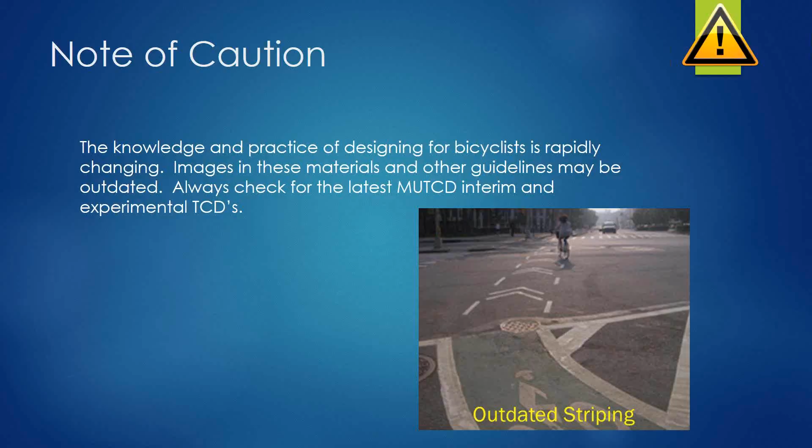So I want to begin by talking about, why are we doing all this effort, particularly for bicycle safety, or bicyclist safety, I would rather say. We've been very auto-focused in our country for a long time. A lot of people have set up their transportation needs based on the automobile. So where does the shift come, or why do we want to consider other modes of travel? There certainly are some opportunities.

First of all, in a national study of transportation, it was found that 50% of all trips are less than or equal to 3 miles in length. More than 1/3 of US adults say they would commute to work by bike if safe facilities were available. And finally, 1 out of every 11 US households do not own an automobile.

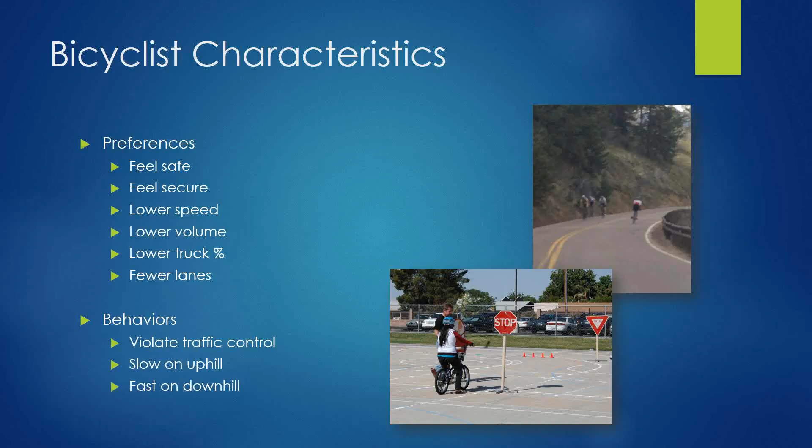Bicyclists will certainly be slower on the uphill. The longer the uphill is, the slower they'll get. So that might contribute to how we think about where we place bike lanes. Maybe we don't need bike lanes on both sides of the street, because on the downhill, they're speeding up, but on the uphill, they're slowing down. So thinking about the conditions and the operations of the bicyclist and how we choose facilities is important.

In many places, it's legal to ride on the sidewalk, and I did not check to see if that's so in Florida, but even if it's not legal, very often people will do it because they feel safer there. They're further away from traffic. However, in certain conditions, this can be the most dangerous thing that a bicyclist can do.

Consider a motorist who's approaching the street from a side road or a driveway. And as they approach, they see that there's no pedestrians on the sidewalk. And so then they turn their focus to finding a gap in traffic and turning onto the roadway. Now, the bicyclist, who can travel much faster on the sidewalk, may be much further away from that conflict point. And while the motorist is looking for gaps in traffic, they approach the car. The motorist then pulls out into or in front of the bicyclist and causes a crash. So cycling on the sidewalk can be a concern, particularly where we have driveways and conflict points.

In terms of the crash records we have across the US, in 2015, we had 818 reported deaths due to bicycle crashes, and an estimated 45,000 injured. The cyclists accounted for 2.3% of all the traffic fatalities in the country, but they only made up 1% of the trips across the country. And if you think about that further, the trips are probably a lot shorter. So if we were talking about miles traveled, the percentage that bicyclists travel as compared to motor vehicles is much smaller. Certainly bicyclists are overrepresented in our crash data.

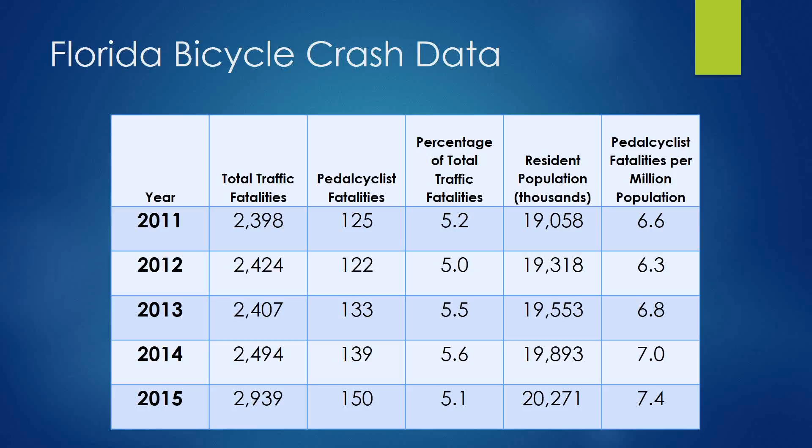And here's some data for the state of Florida, where you are showing that about 5.5% of your traffic fatalities are bicyclists. You're averaging between 125 and 150 bicycle fatalities every year.

And so we've talked about the crash data and the numbers of deaths and injuries that are experienced, but how do we truly measure safety? Certainly, because we can count the injuries and fatalities, that's one way. Certainly being alive and whole when you arrive at your destination is important.

But more than that, being calm and confident, feeling like you would want to take a bike ride again, feeling like that you can travel home the same way you came without putting your life at risk is an important consideration. I had an experience just last week where a garbage truck passed me within 2 feet.

And that seems like plenty of space. You know, they didn't touch me, certainly, but I had thoughts of falling over and ending up under this garbage truck and what might have happened with just a minor slip of the handlebars. That gave me pause and made me think about what I was doing and how I could have prevented that and what I could have done differently. And certainly if there'd been more separation between me and that garbage truck, I would have felt calmer and more confident about my experience on the ride.

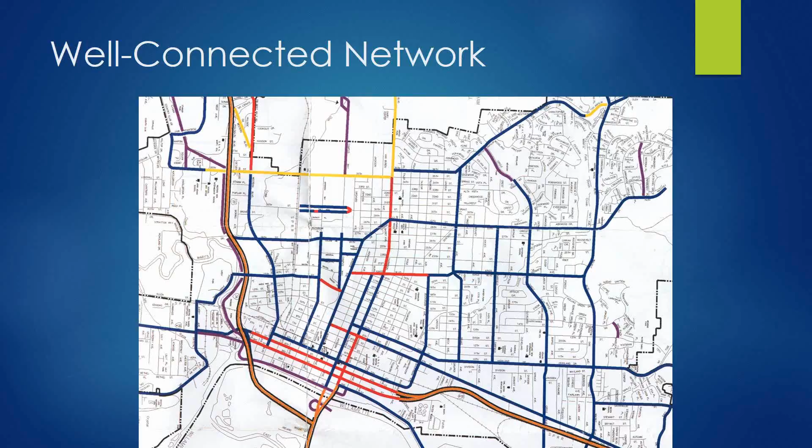I'd like to review some core safety concepts for designing for bicyclists. First of all, it's difficult sometimes to get the data we'd like to have to make a quantitative evaluation of what we're designing, but we do know what contributes to or detracts from the safety and the feeling of safety and comfort that a bicyclist might experience. And so keeping these forefront in our minds as we're evaluating our public rights of way in our streets, we can diagnose where those risk points are and think about what countermeasures might reduce the risk that is experienced.

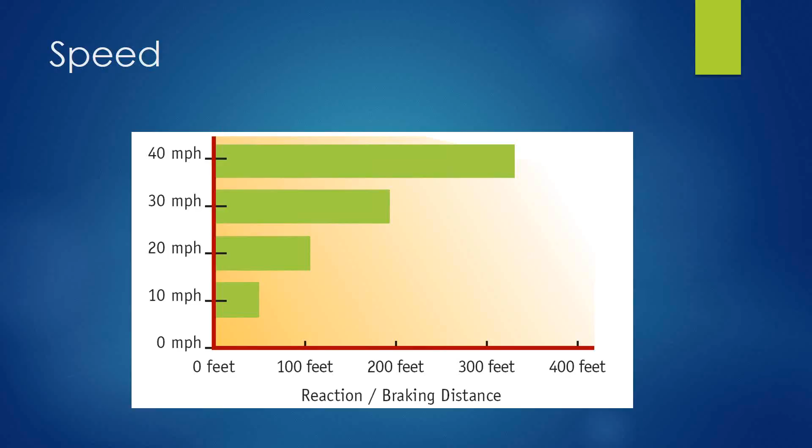The first key safety concept is speed. Certainly, speed is going to contribute to the reaction time of motorists approaching a bicyclist, or even a bicyclist approaching an intersection at the speed they're traveling. And the higher the speeds are, the more distance it's going to take for the motorist to brake and stop and avoid a crash with a bicyclist.

But more than that, thinking about the different modes of travel, a motorist has that armored vehicle around them to keep them secure. They have airbags and seatbelts. A bicyclist may have a helmet. And more than that, the bicycle itself might become a projectile in a crash, where the bicyclist could be further injured by the fact that their bicycle is flying through the air with them.

This study that I'm showing is related to pedestrians more specifically, but I would suggest that other than the helmet and the bike, bicyclists and pedestrians are very similar. They don't have the seatbelts, they don't have the airbags, they don't have the vehicle that's surrounding and protecting them in a crash. And we find that at 20 miles per hour, 9 out of 10 pedestrians who are in a crash with a motor vehicle will survive. However, at 40 miles an hour, 1 out of 10 pedestrians who are in a crash with a motor vehicle will survive. So 9 out of 10 pedestrians in that crash at that speed will die.

And this is pretty significant when we're thinking about the speeds that motor vehicles are traveling on our roadway. And we can think about, are there options to change the context of the roadway and have slower speeds? Or maybe there's an alternate corridor that can be used. Or understanding that the speeds are a significant risk, providing more separation for the bicyclist from the moving motor vehicles.

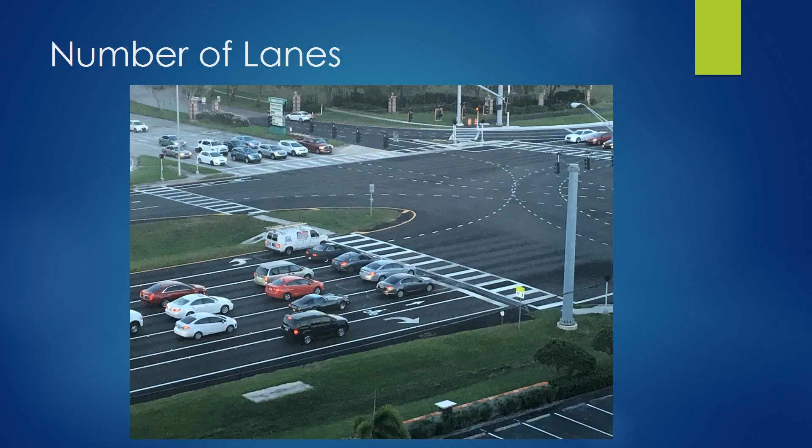The next safety concept is visibility and conspicuity. Certainly, it's important for the motorist to be able to see and recognize where those conflict points are with the bicyclist, and for the bicyclist to be aware of when motor vehicles are going to be crossing their path.

And nighttime conditions can be a huge concern. Very often the street lighting we have on a roadway is lighting the street, but it doesn't adequately light the area where the bicyclist might be traveling, in the bike lane near the shoulder, or maybe the intersections have a large luminaire that casts a glow over the center of the intersection, but it doesn't illuminate the crossing conflict points.

And then we can use traffic control devices sometimes to highlight the conflict points where the motor vehicle and the bicyclist are crossing paths, trying to raise awareness, make both the bicyclist and the motorist more watchful of those locations.

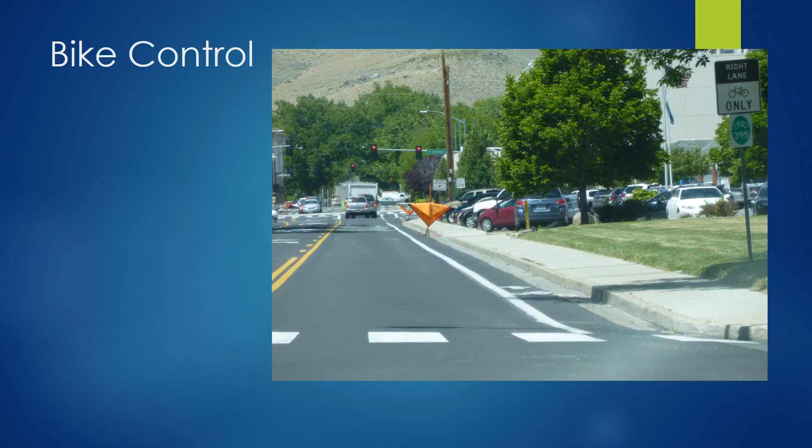Bike control is a term I like to use to describe the condition of the pavement or the things that we put in the pavement. Sometimes it's just the debris that brushes over. I like to use the term road crocodiles or road alligators, and you probably have real crocodiles and alligators in Florida, but I think of those tire remnants that are left behind by the trucks, and so often they end up in the shoulder or the bike lane. But the sand and debris that can end up in the bike lane is a concern, but also things like the lip of the gutter or utilities or pavement condition.

There was a city where I was riding in their bike lane. It was a perfectly good bike lane. There had been some utility work done on that street, and the utility line was cut longitudinally down the center of the bike lane, right where my bicycle tire would be. And so I'm riding on a bike with a 1-inch wide tire, and there's a seam that's making it difficult to travel. Whereas if that utility cut had been in the motor vehicle lane, I don't think the motorist would have hardly noticed it. But it certainly was an issue for me as a bicyclist.

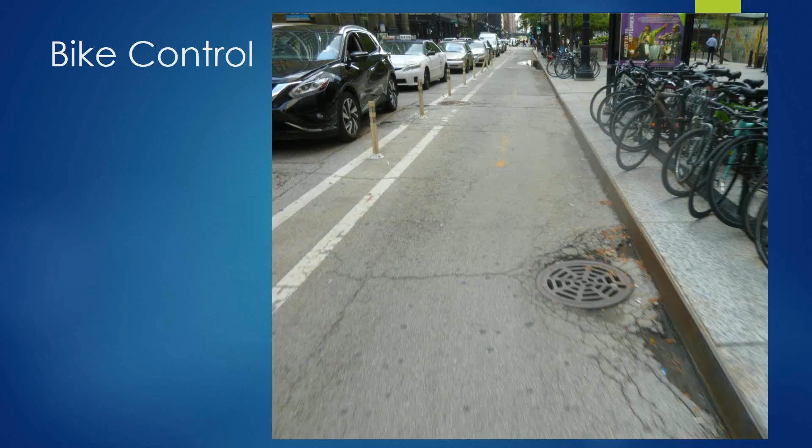And finally, the last issue is connectivity. If I'm riding along in a nice, comfortable bike facility, and then it simply ends, and I'm falling off the face of the earth, essentially, then what do I do? So often, because we don't have the connectivity, we find ourselves stranded in places that are not comfortable or not safe given the skill level of the bicyclist.

And this can be a challenge because as we're developing these facilities, we can't necessarily install them all at once, but it's important to be thoughtful about the transitions, at least providing a few extra cues at the beginning or the end of the facility to try to help someone transition over to where they should be as they continue their journey.

And I've seen some things that I think are a misapplication of some of the signage that we have. We have signs that say bike lane begins, bike lane ends, and so often I have seen locations where along the corridor, they'll have a lovely bike lane between the intersections, and at every intersection on the corridor, the bike lane ends. And on the far side of the intersection, the bike lane begins again. And while that's true, I think we've treated the bicyclists poorly by letting them make a free-for-all through the intersection without providing any sort of continuity or even a few shared lane markings through the intersection to help them progress.

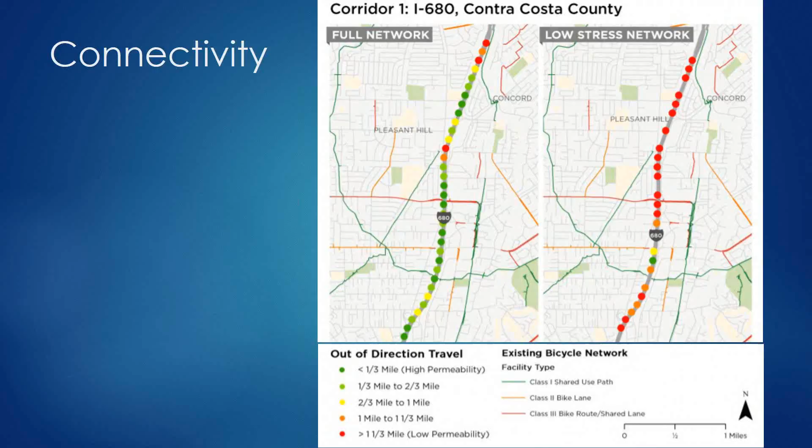And so on the left, they looked at all facilities that were available to bicyclists. But on the right, they looked at only the comfortable bike facilities and looked at how far out of direction you'd have to travel to remain on a comfortable route. And so this is an interesting measure of looking at network connectivity. And there are other tips and tools in that guidance document that I'll provide a reference to you later.

So just to review, these key safety factors are speed, number of lanes, visibility, traffic volume and composition, conflict points, proximity to moving motor vehicles, how well we can control the bicycle, what that pavement condition is, and connectivity of the network.

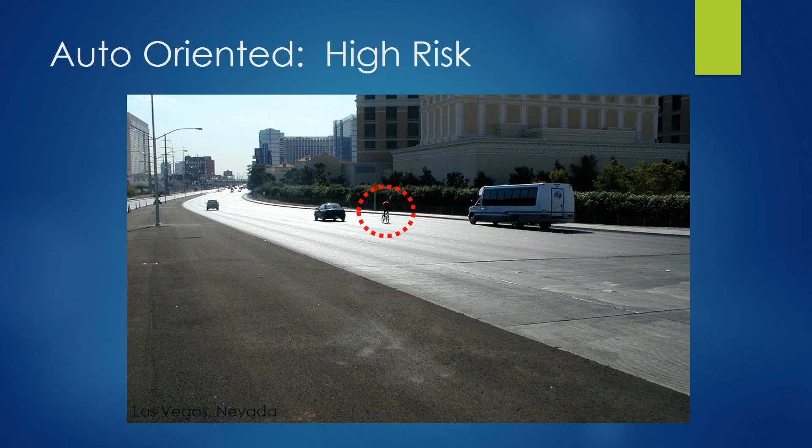Alternatively, we have this corridor in Las Vegas. Certainly, motor vehicles rule on this corridor, and yet we still have a hardy bicyclist out there in the middle of the road trying to get to where they need to go. The risks are going to be higher in this context. So we have to ask ourselves, are we going to provide space on the street or provide space away from the street? Or are we going to slow traffic down in some way and adjust the context so that bicyclists can mix with traffic safely?

And instead of asking ourselves, where can we put bicyclists? This was sort of the question when I was a novice designer working for a state agency. We'd focus all of the attention on motor vehicle volumes and queue lengths and storage for the intersections. And at the end of all of that, well, if this was an identified corridor for a bike lane, we might squeeze in a bike lane, but no more thought than that. And we might tack on some sidewalks and throw in a detail for curb ramp. But we really didn't think in great detail about the placement of some of those facilities and how to make them suitable for all types of users.

I think the industry has changed over the years. I think people have a greater understanding now of what all the modes need and trying to make it safer for all modes. So instead of asking, where can we tack on a bike facility, we should be asking ourselves, how can we better design our facilities to be inclusive of bicyclists as well as pedestrians?

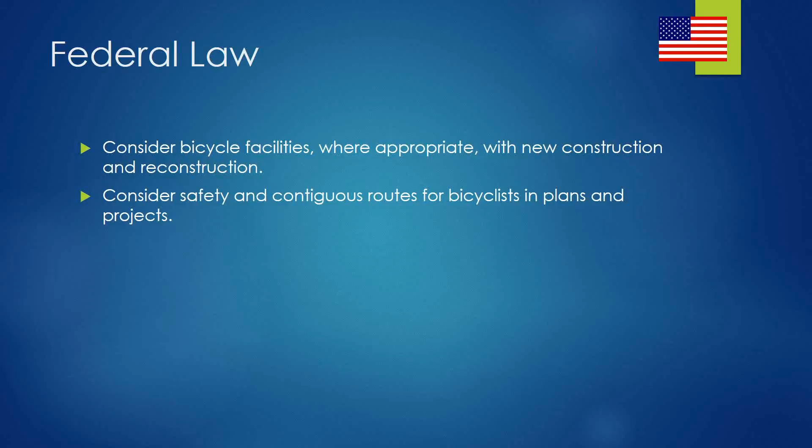So in terms of the design policies and where we are now, just for reference, the federal law says we must consider bike facilities where appropriate with new construction and reconstruction, and consider the safety and contiguous routes for bicyclists in our plans and projects.

But I'd ask you this, what does consider mean? Have we simply said, well, this is not a safe facility, so we're not going to put any bike facilities on it. I've considered it, check the box, I'm done. Or have we actually developed alternatives? Have we looked at providing an on-street facility as compared to an off-street facility versus an alternate corridor? Have we really thought about how a bicyclist can travel through the route that we may be considering?

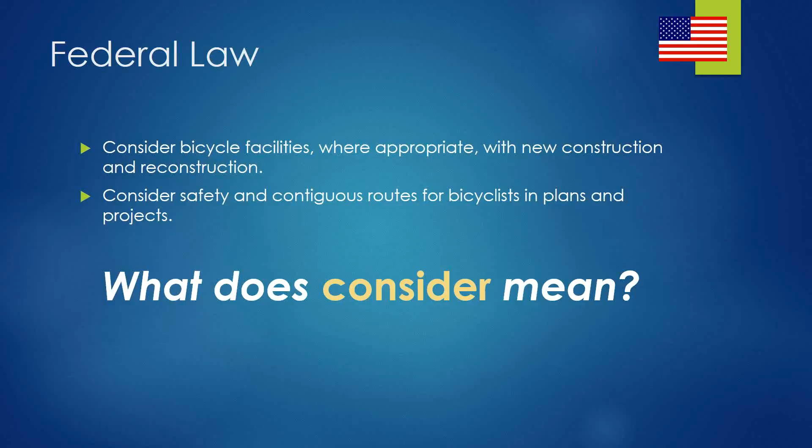In 2010, our Secretary of Transportation, who at that time was Ray LaHood, signed a policy in which it said every transportation agency, including the Department of Transportation, has the responsibility to improve conditions and opportunities for walking and bicycling, to integrate walking and bicycling into their transportation system. And I think integrate is perhaps a better description of how we should be tackling this, as opposed to simply considering.

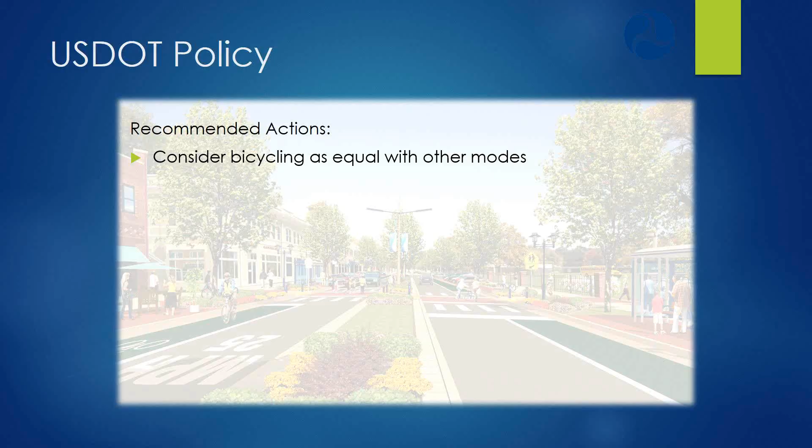This policy had a number of recommended actions that I'll share with you here. First of all, considering bicycling as equal with other modes. And that's hard to do, but so often I see situations like in a work zone where there might be 2 motor vehicle lanes and a solitary bike lane, but what gets shut down? The bike lane. Where for the motorist, maybe a mile out of direction wouldn't be too difficult. For the bicyclist, that mile out of direction takes a lot of effort. And so thinking about where our priorities are is important.

Ensuring transportation choices for all ages and abilities, especially children. Remember, children are usually in that level of traffic stress 1, and are we providing them an option to travel?

Go beyond minimum design standards. If we start putting in a minimum or less than minimum parking lane and a minimal bike lane with a minimal motor vehicle lane, and we start adding those up across the corridor, we can end up with something that's uncomfortable for everyone. We need to be a little bit cautious. Maybe if we have to compromise on the parking lane, we can put a little more space in the bike lane or provide a buffer. And maybe we compromise the motor vehicle lane to get some more sidewalk space. But if we do minimum upon minimum, we end up with something that maybe is not desirable.

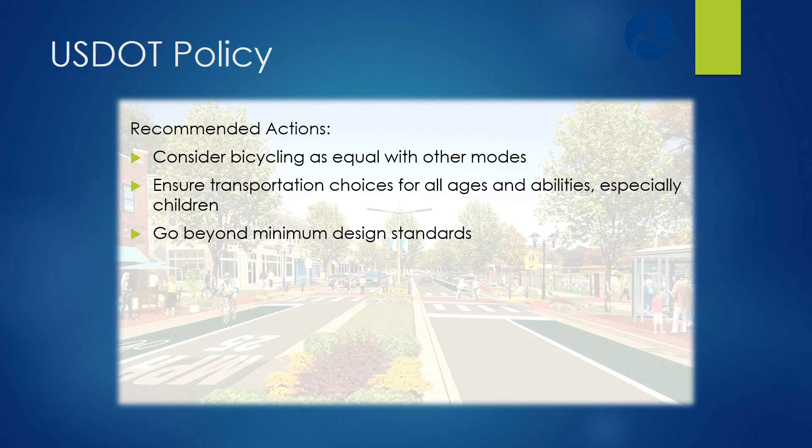And maybe that's where we think about how not every corridor is suitable for all modes. Maybe we focus on the heavy vehicles and the commuter traffic on one corridor, but we make sure there's a nice parallel corridor where we can create that bike boulevard where there's a whole different context.

Integrate bicycle accommodation on bridges. When I think about the bridge in my town, I live in what is best described as a whistle stop in Kansas. Most people think mountains in Colorado. Well, I'm out on the plains. And when this town was first established, there wasn't a freeway, of course, and we were all on the north side of the railroad tracks. Well, now, in time, the freeway has been constructed with our freeway interchange and the bridge, and other houses have been built on the south side of the railroad tracks.

That bridge has been here for 60, 70 years. And it was not built to accommodate pedestrians or bicyclists. It was simply meant for cars. And at the time, there was no pedestrian or bicycle traffic across that bridge. But now that we have a town that is on both sides of that freeway, I frequently see pedestrians and bicyclists walking across the bridge. So when we're building structures that have a very long design life, we want to think about what might happen before the service life of that bridge is up.

Very often when we put in a freeway interchange, what pops up first is a gas station or a truck stop. Maybe over time we'll get a grocery store or a Home Depot. And now we suddenly have a whole bunch of trip generators where there might be a demand for pedestrian travel.

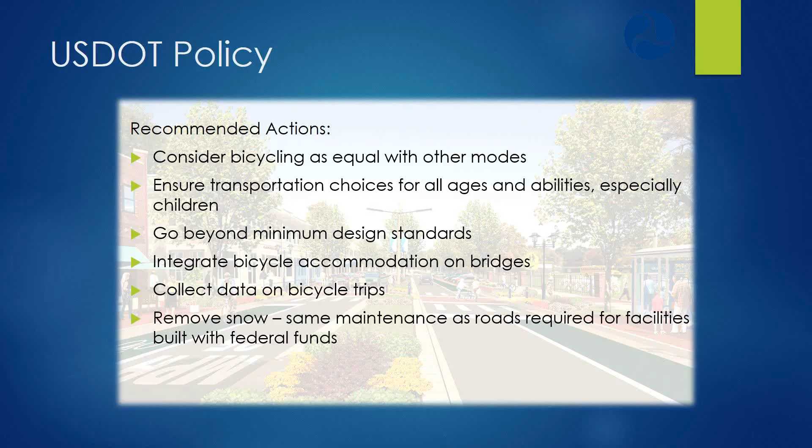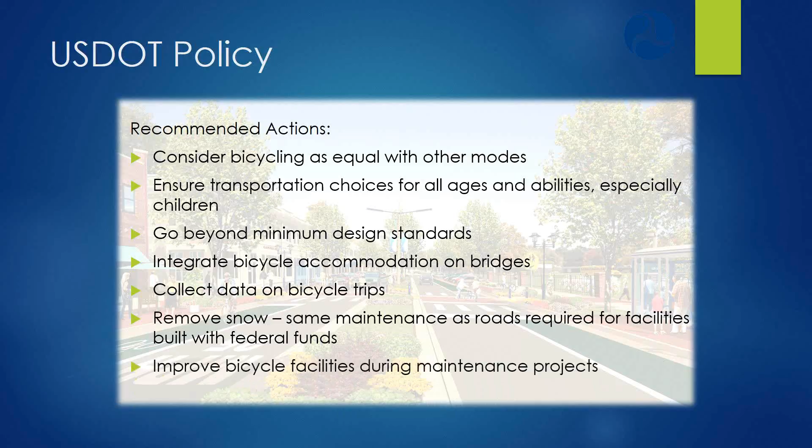Removing the snow is probably not so much of an issue in Florida, but certainly doing appropriate maintenance on our bike facilities so that they're traversable. And using maintenance projects where we're doing resurfacing as an opportunity to rethink our cross-section. Maybe our travel lanes don't need to be 12 feet wide. Maybe we can compromise there to provide a little bit of a buffer for bicyclists.

So how do we evaluate our needs for bicycle travel? Certainly data collection is going to help us. In Colorado, our ped bike coordinator for the state DOT was able to collaborate with Kaiser and obtain some bike counters. And by using those bike counters on some of the bike corridors, she was able to find out that there were upwards of 200 bicyclists a day using these corridors during snowstorms.

And by sharing that information with maintenance, she was able to give them a motivation to, oh, maybe we need to clear that bikeway sooner than we would originally consider doing it. Their assumption was bicyclists aren't traveling in the snow. But by having a little data to demonstrate that bicyclists are continuing to commute in bad weather, it changed their thinking and their priorities.

So certainly identifying high crash locations, corridors or areas, but more than that, identifying locations with a potential for crash, because the numbers are relatively small and bicycle crashes are going to be a little bit more dispersed. It might be difficult to anticipate where our riskiest corridors are simply by looking at existing crash numbers. Certainly using those numbers or those risk factors that we've identified to prioritize and identify the appropriate treatments or countermeasures.

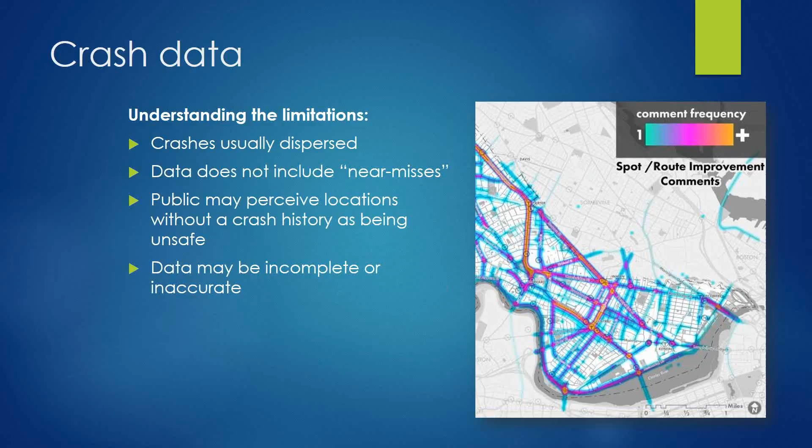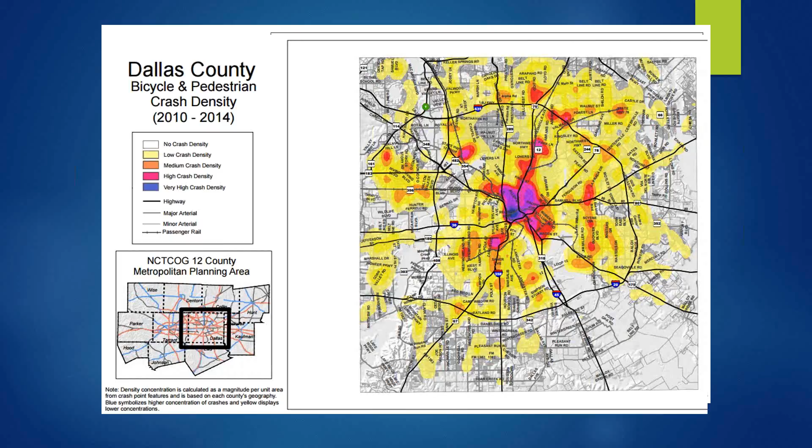This is an example of the data that is publicly available on the internet for the Dallas metropolitan area, where we have a heat map that shows where all the bicycle and pedestrian crashes have happened in their community. And then you can also look at the point locations for those crashes as well. So that's certainly data that they can use to help prioritize where they're going to add treatments to reduce risk.

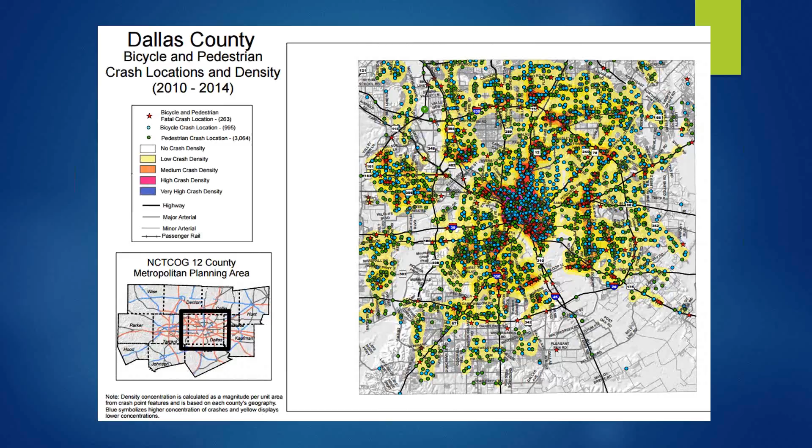Now let's talk about some of the evaluation tools that we have and how they work for evaluating bicycle facilities. So I'll talk about the Highway Safety Manual, the Bicycle Intersection Safety Indices, the Highway Capacity Manual, road safety audits, and a tool that we call Bike Safe.

The Highway Safety Manual has certainly been a revolutionary change in safety analysis, where before, it was simply a matter of, did I follow the standards? Well, then it should be safe. But when we want to apply a flexible approach and make compromises here and there, it's hard to know at what point have I crossed the line, where have I increased the risk too much.

So the Highway Safety Manual gives us a predictive way of measuring safety, where we can do a very long calculation that includes key features for a roadway like traffic volume, lane width, and so forth, and get a predicted number of crashes, which is referred to as the safety performance function, or usually the letter N. Now, just for your information on how the number of bike crashes is predicted using this methodology.

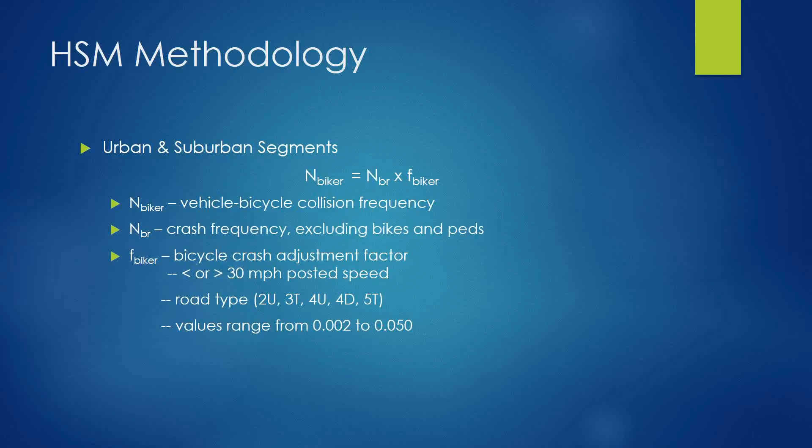And it's not going to be very helpful in telling us whether we've applied the appropriate countermeasure. And furthermore, it's only available for urban and suburban segments. We don't have any sort of tool for predicting bike crashes on rural segments. Furthermore, once you've calculated your predicted number of crashes, you can go to the CMF Clearinghouse, or the Crash Modification Factors Clearinghouse, to see what countermeasures might tend to increase or decrease crashes.

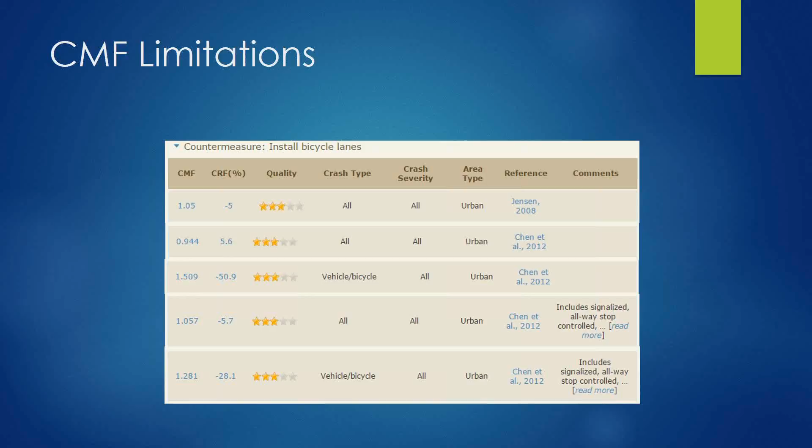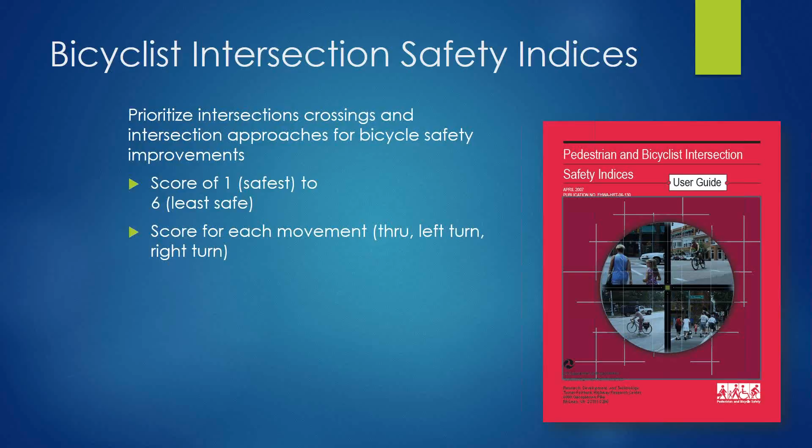One tool that we do have available that can be helpful now is the Bicyclist Intersection Safety Indices. And this is a publication put out by FHWA. It's available for free on our website. And using some very simple data, you give each movement at each intersection a score of 1, which would be the safest, ranging up to 6, which would be the least safe.

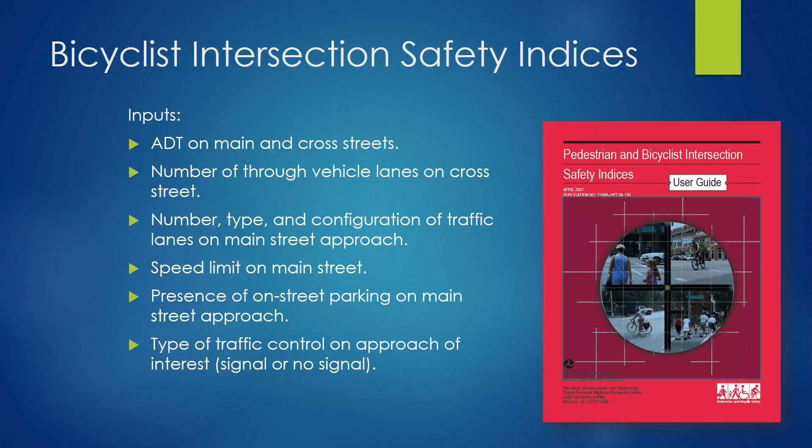Some of the data that goes into this score would be the traffic volume, the number of lanes on the cross streets, what sort of lanes you have at the intersection, speed limits. They're not even asking for speed, just speed limits, whether there's parking, and what sort of traffic control you have at the intersection. All fairly simple data to collect. It's something that maybe an intern over summer could look at a corridor or at several corridors in your community, collect the data, and you could come up with some rankings to help you make some decisions about where to prioritize treatment.

Just a few comments about the Highway Capacity Manual. Certainly the Highway Capacity Manual for much of its history has been very auto-focused, but in the last 2 editions, it has included pedestrians, bicyclists, and transit, and level of service for each of those modes. Now, in the first edition, there were some problems because the first edition was still thinking of a bicyclist like a motorist, but there's other factors that contribute to the bicyclist quality of ride beyond just travel speed and intersection delay.

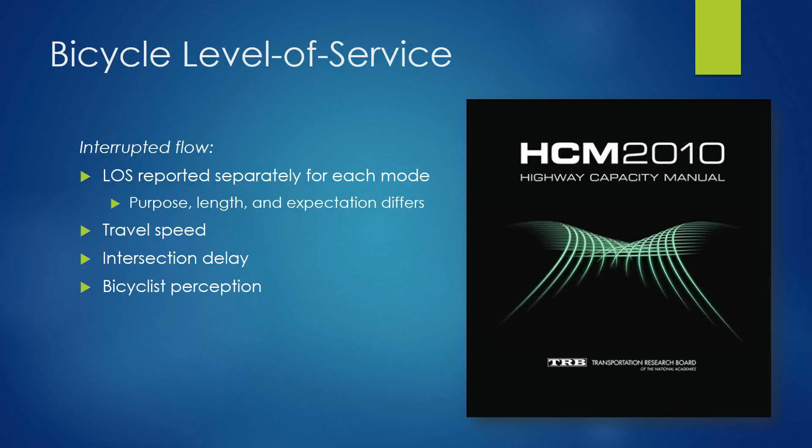So they've included this bicyclist perception score that captures a lot of things that we've been talking about, like motor vehicle volume, the percent of heavy trucks, number of lanes, how wide is the outside lane, whether there's medians or curbs, access control, pavement condition, and the speed of the motor vehicle. All of those things get rolled into that score and can give us a level of service for bicyclists.

So if we're looking at a facility where we want to encourage pedestrian and bicycle travel, we might make some compromises on level of service for motor vehicles. I'm thinking about the fact that peak hour or hours might be 2 to 4 hours a day, but have we made something to save travel time for motor vehicles?

Have we ended up with something that is terribly uncomfortable for pedestrians and bicyclists? And are we willing to make some compromises for that portion of the day where maybe there might be some delay?

Another tool that we have for assessing safety is the road safety audit process, which is a formal study where a group of independent professionals with multidisciplinary backgrounds, you might have planners and designers, but also law enforcement officers or the school district transportation director or a bicycle advocate, participate for an afternoon or a couple of days to review a corridor, make a site visit, walk the corridor, and identify opportunities for improvement.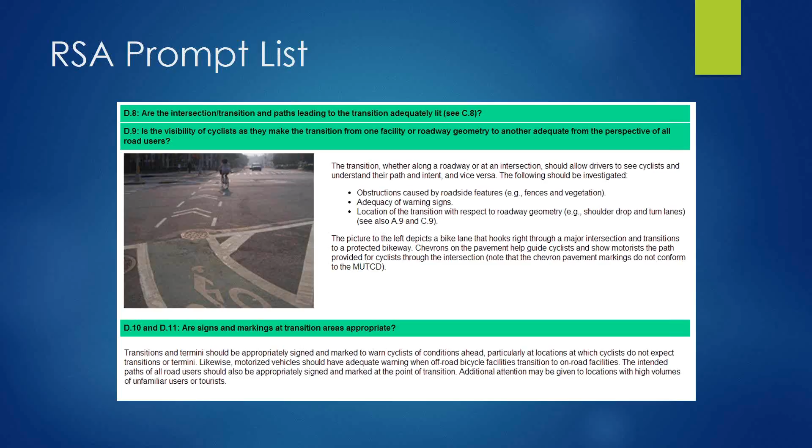This tool also includes the bikeability checklist. And this is more of a survey format that you could use with the community or members of the public to help tease out the information from them about where they feel safe or where there's opportunities for improvement on a bike corridor.

Now, how do we select countermeasures for bike facilities? We certainly have design guides available to us. And there was a lot of push at FHWA to clarify our position on being flexible in our design. You know, if you look at the AASHTO Green Book, there's a lot of discussion about context and trade-offs and flexibility, but we wanted to put out a memorandum in 2013 to clarify our position on using design flexibility to accommodate bicyclists and pedestrians better in our roadways.

It provides support for taking a flexible approach, and the memorandum specifically cited other resources that we can look to beyond the AASHTO Green Book. There's the AASHTO Guide for the Development of Bicycle Facilities, but there's also ITE's Designing Walkable Urban Thoroughfares, and that is a publication that's free and online. I don't think I have the reference for that one in this presentation, but if you simply Google that name, you'll find it. There's also the Urban Bikeway Design Guide that was produced by NACTO. And since that time, we've produced a number of other publications that also provide a lot of information and detail on designing for bike facilities.

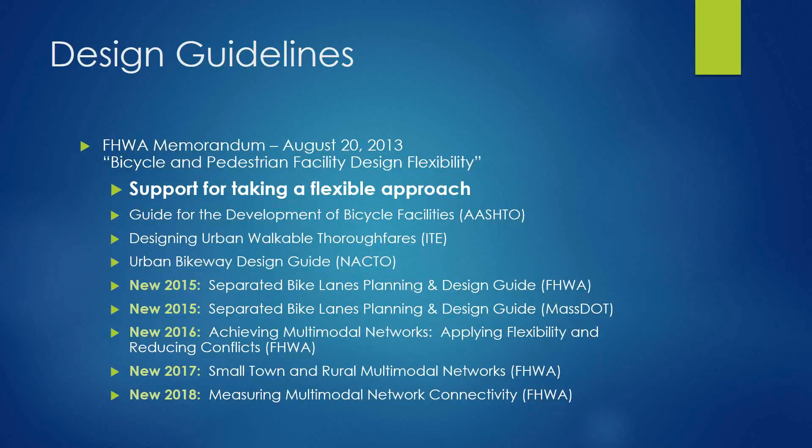In 2016, we came out with a document, Achieving Multimodal Networks, Applying Flexibility and Reducing Conflicts. In 2017, we issued Small Town and Rural Multimodal Networks, and that has some great tips on some simple fixes to something as minor as how we address shoulder striping at a rural intersection to improve it for bike safety, which is something that would be no cost if it was done in the course of a resurfacing project. And then just this year, I mentioned this document before, Measuring Multimodal Network Connectivity, which is a great tool for suggesting different ways to measure how well our network is working.

And this is a website that is managed by the University of North Carolina, our Pedestrian and Bicycle Information Center. It's called pedbikesafe.org. There's both pedestrian and bicycle components. Here we're looking at the bicycle module, where you can look at background information, analysis tools, statistics about bicycle travel. There's a list of countermeasures, and you can enter in some simple data about a project and what you're hoping to achieve, and it will give you a table of potential countermeasures that you might want to investigate, and then you can click on any of those countermeasures and find some more information.

And then finally, in terms of traffic control devices, I mentioned that they're changing rapidly. The traffic control devices in the current MUTCD do not cover the range of options we have available for improving bicycle facilities. FHWA has a process where we allow for experimentation. If you come up with the best new idea on a traffic control device, if you'll work with us, you can put it in place, and with some evaluation before and after, it might become the new nationwide standard in